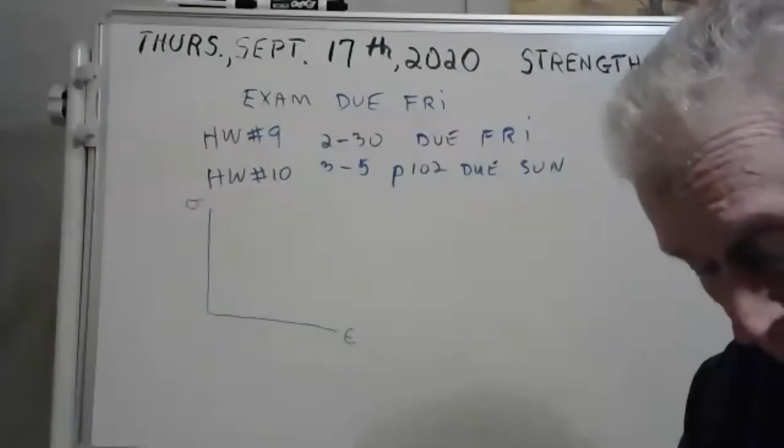And it's unique. If you take a particular alloy of steel, for instance, see they have some sample ones in the back. They have A36 structural steel. They have stainless steel. They have tool steel. They have other stuff back there, brass, aluminum. They have a stress-strain diagram that's as unique to them as your fingerprints are to you.

They identify the material. Now you need to know a few terms here when it comes to properties of materials. There's brittle and ductile materials. You guys can read all that, all of that is on the blackboard. You can read it. It's all right there.

But when it comes to materials, there's brittle materials and there's ductile materials. And the difference is brittle materials don't have a yield region. Like, for instance, concrete goes like this, pow, with no warning whatsoever.

They have a concrete tester. They go out to the highway and they take a core sample of your road, concrete, asphalt, whatever it is, and they bring it back to their testing lab, and they put it under a lot of pressure, and they increase the pressure, and increase the pressure, and all of a sudden, without warning, pow! And sand, there's sand in that concrete, it goes flying all over the place. You want to have your safety glasses on when they do that test.

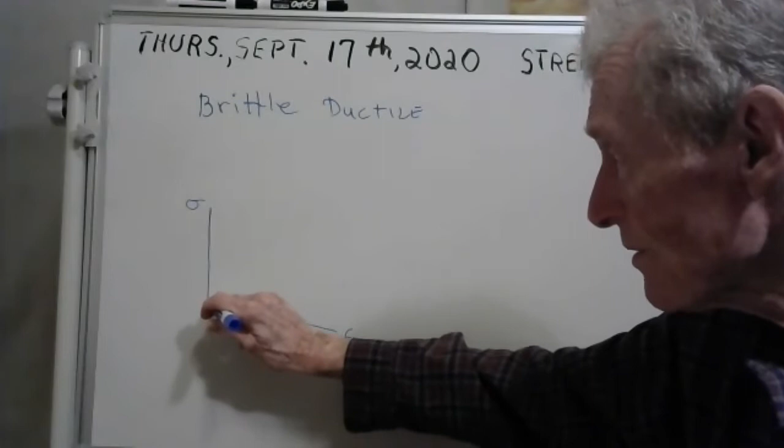There's no yielding, it's brittle. Whereas steel has an elastic region that comes up here—really very steep—and then it flattens out. Then it does all kinds of crazy things, and finally, kapow, it will break as you increase the tension on your steel. This right here is called yielding. Well, all of this is called yielding. But see, steel has yielding—brittle materials don't.

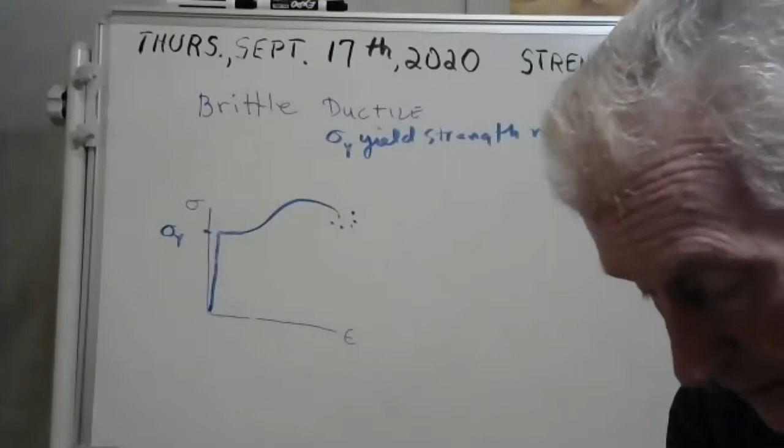This place right here is called the yield strength. The symbol is sigma Y. It's called the yield strength normal stress. That's the name of it. They have tables of it in the back—go back here, and there's the yield strength of different alloys of aluminum and copper and brass and steel. They're all in the back. It's called the yield strength.

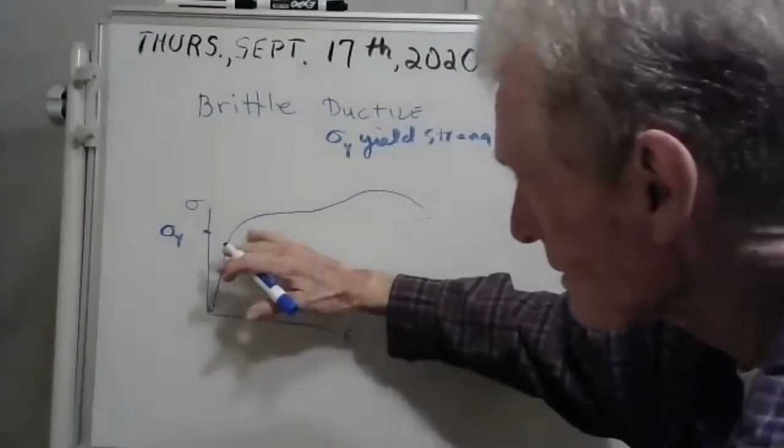Now, to be honest, some of these materials don't go exactly flat like that. Let me show you what they'll do. Some of them will come up here—they'll have a straight line—but then it kind of curves a little bit like that, and pow, like that. So where exactly do you put the yield strength? Do you put it here? Maybe in here someplace, or where it starts to turn? Where do you put the yield strength?

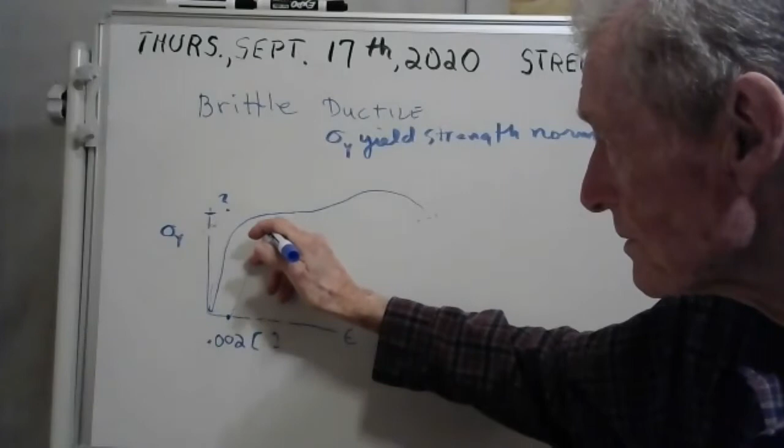Well, they made an agreement. They come over here at 0.002 nothings—remember, strain is dimensionless. And if you come up here parallel with the same slope—remember the slope is called the modulus of elasticity, it's the slope of the elastic region. See, this is the elastic region.

Everything else is the plastic region. That's not exactly parallel—let me try again. Parallel is more like maybe like that. If you come up here parallel and you hit this, and then you go over, that is defined as the yield strength normal stress for 0.2% permanent strain. It's got a fancy name. Can you read my writing? That's supposed to say elastic. That place right there is called the yield strength for 0.2% permanent strain.

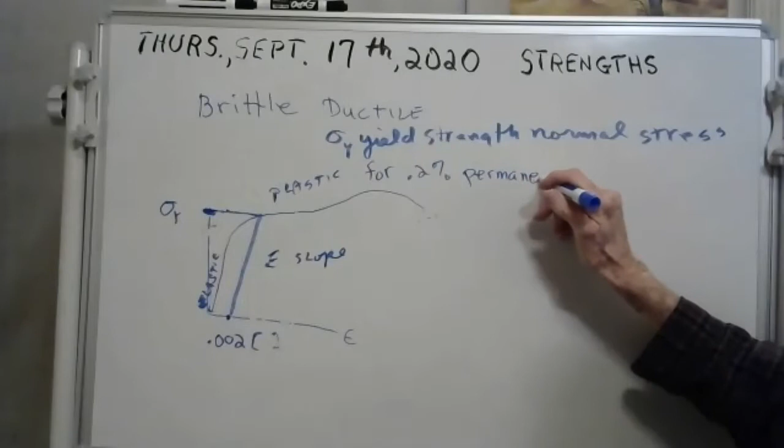Remember, this here's strain—we got strain down here. And see, 0.2% is equal to 0.002. You guys all took grammar school percentage math, you know that. So if you go parallel to your same slope here, and then go over, they call that your yield strength for 0.2% permanent strain. See, this right here is your permanent strain.

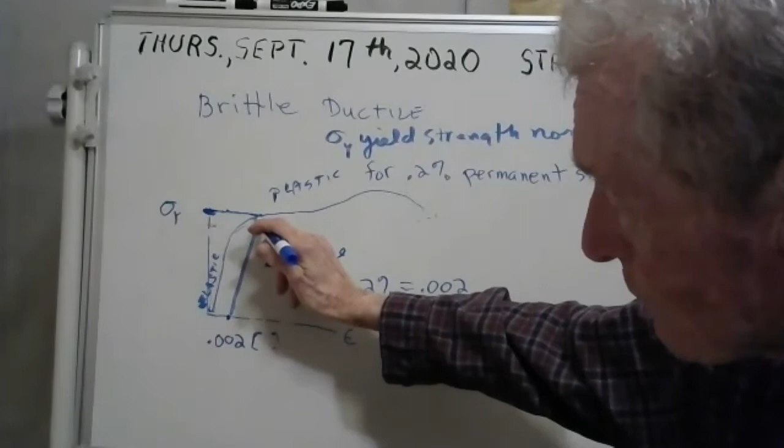What you got to understand is when you take the load off—see, you're increasing the load, increasing the load. Right here, if you take the load off, if you quit stretching it, you've got this sample, this specimen, and if you take the load off, it recovers elastically. This right here, if you go straight down, let me color that green. See that green right there? That's your strain recovery. That's the name of that—your strain recovery.

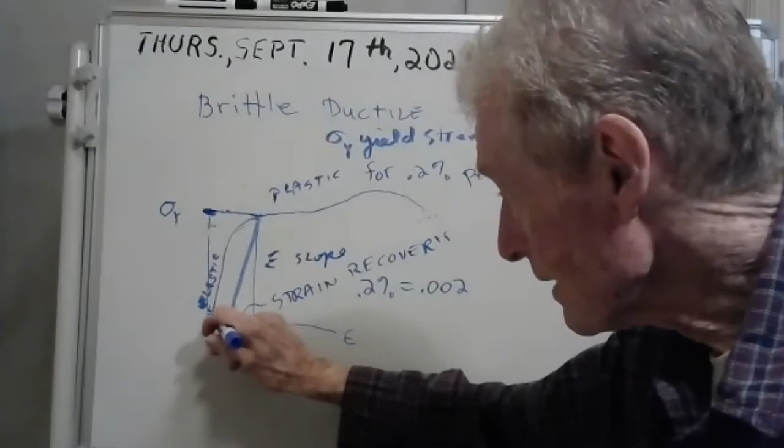And this right here, why don't I color that maybe something? That right there, that's your permanent strain. Permanent strain. Did that show up? Yeah, I think so. Well, there's brittle materials and there's ductile materials. Ductile materials have a yield strength, brittle materials don't. Any questions so far?

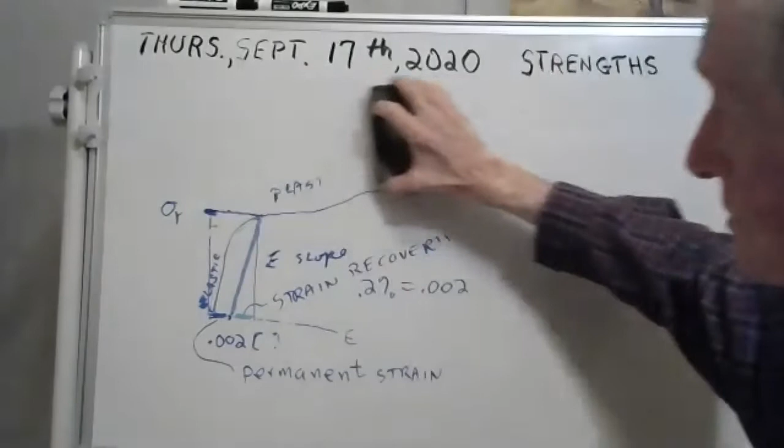Okay, well let's talk about hardness and softness. I'm going to erase all this, I need the room here. We talked about brittle materials and ductile materials—you could read the book, you don't need me, you could read the book. But there's something else called hardness and softness. Hope you can read my writing.

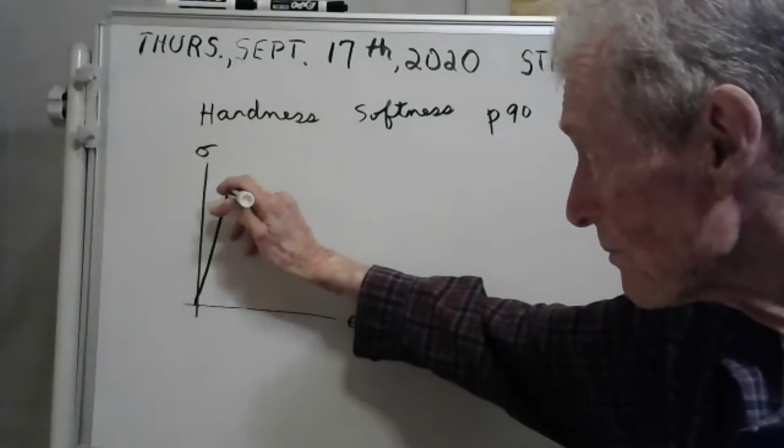Okay, there's a diagram in your book that explains this really good. If you look on page 90, they have a stress strain curve for a bunch of different steels. What's interesting is they all have the same slope. But see, spring steel has a yield strength way up here. And hard steel is right here—this is hard steel. This is on page 90.

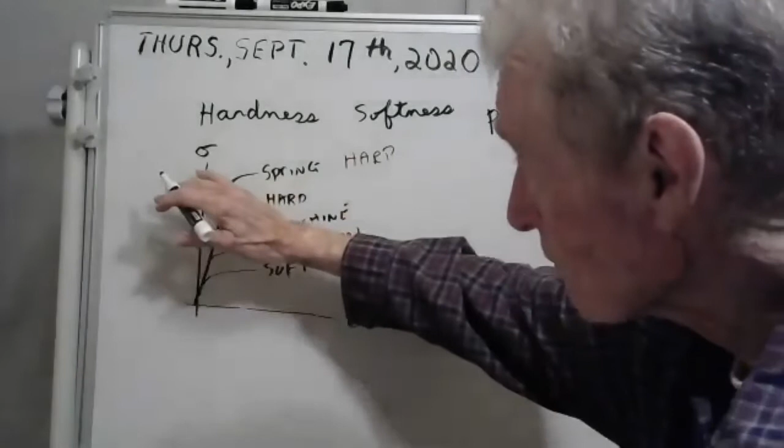This is spring steel, what they make springs out of. This is machine steel—it's pretty dang hard. And then this is structural steel, right in here, you guys could read this. These are all different kinds of steel. And then there's soft steel—there you go, soft steel. See, these are the hard ones, and these are the soft ones. And it's the yield strength—the hard ones have a big yield strength, and the soft ones have a small yield strength. That's the difference between hard and soft. If it's steel, if it's the same molecular structure steel, the same alloy, then it has the same slope—it has the same modulus of elasticity. Remember, Hooke's law goes like this.

It's kind of like an equation y equals kx. You guys studied algebra, that's the slope. If you plot up y equals kx, that's the slope. Well, if you plot up sigma equals E epsilon, that's the slope.

Now, how do you make a steel hard? How do you make it soft? There are three ways to make a metal like steel hard. I will ask you guys, I don't want you to fall asleep.

Samuel, unmute. Samuel, say hello. Hey Samuel, I'm just going to ask you, do you happen to know the three ways of making steel harder? No. That's okay, you're going to learn. I'm going to tell you.

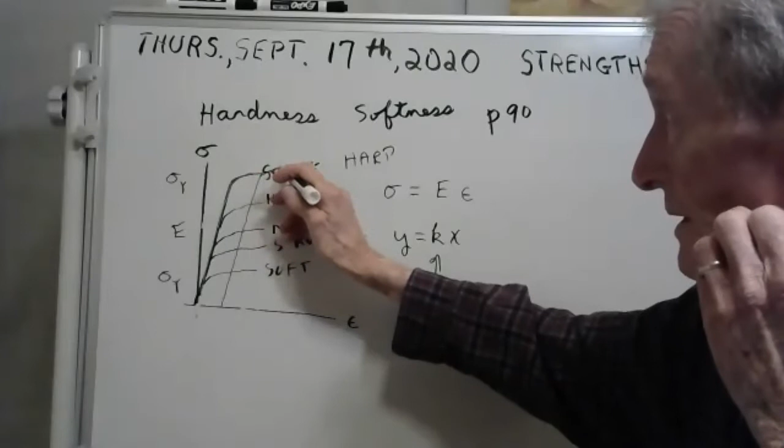Now another way is by stretching it, putting a lot of tension force on it. For instance, if you take your steel and put a lot of stress on it, then back off, it will recover elastically. You have now a stress strain graph that comes way up here and has a very big yield strength. They call that strain hardening. They overload it and then take the load off, and what they've got left is a hardened steel.

Okay, well, there's the three ways that they harden steel.

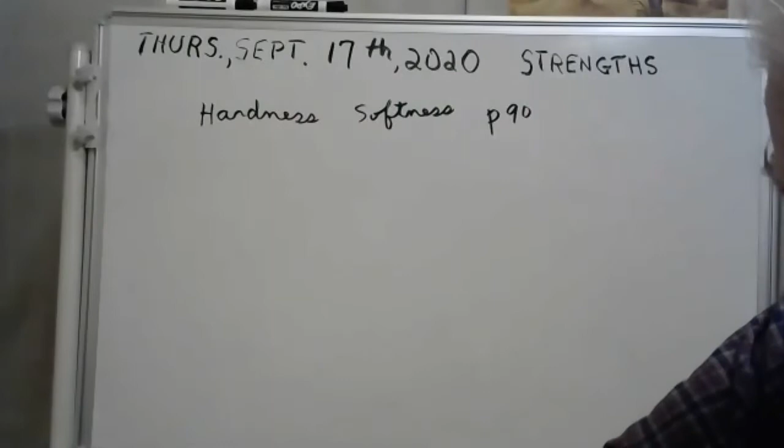Now we've talked about hardness and softness, and ductile, and what was the other one? There's ductile and there's the other kind. What's the other kind? Let me ask somebody. Nicholas, there's hardness and softness, and there's ductile and something else. What's the other one, Nicholas?

Brittle. Yeah, brittle, that's right. They're ductile and brittle. Yeah, okay, we talked about that. Ductile and brittle.

When I think of brittle, I think of peanut brittle. I don't know if you've ever eaten peanut brittle, but it's pretty good stuff. They have Spanish peanuts in there. It's kind of a brown color, and it's real hard, and it snaps. It's brittle, it's not ductile.

Now, if you want something that's ductile, take a piece of chewing gum, like Wrigley's Spearmint, and bend it. Well, it doesn't snap, it doesn't break in two, it just bends, doesn't it? See, the chewing gum is ductile. Peanut brittle is brittle. That makes sense.

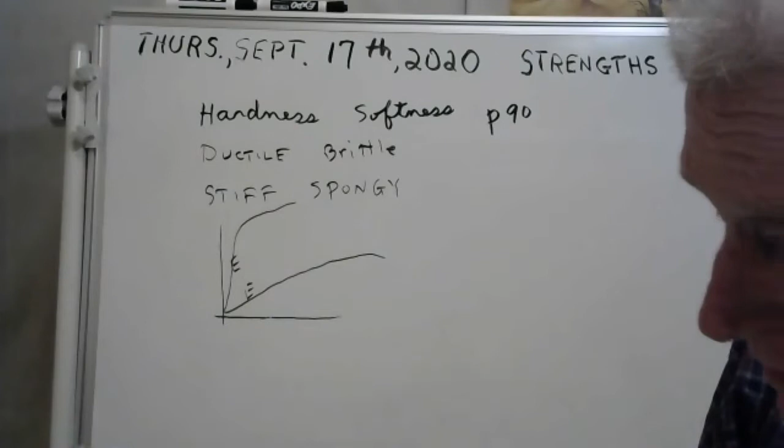See, a stiff material has a very big slope. There you got a big slope, and it goes on there. See, that's stiff. And here's the spongy one—spongy material, there you go. Look, the slope is smaller. Spongy materials have a small slope, and the name of that is the modulus of elasticity.

You can go in the back and look it up. Go back here, modulus of elasticity. Well, there they are. They have some numbers that are big and some numbers that are small. Like, for instance, they have an aluminum one, it's 10.6. And what it says is 10 to the third KSI. If you look in the back, you'll see this for one of those alloys of aluminum.

Now, I would write that as 10.6 MSI, because if you have 10 to the third KSI, that's equal to an MSI, all right? But down here they have structural steel. The modulus of elasticity for structural steel is 29, then they have that 10 to the third thing, KSI, but I would write that as 29 MSI.

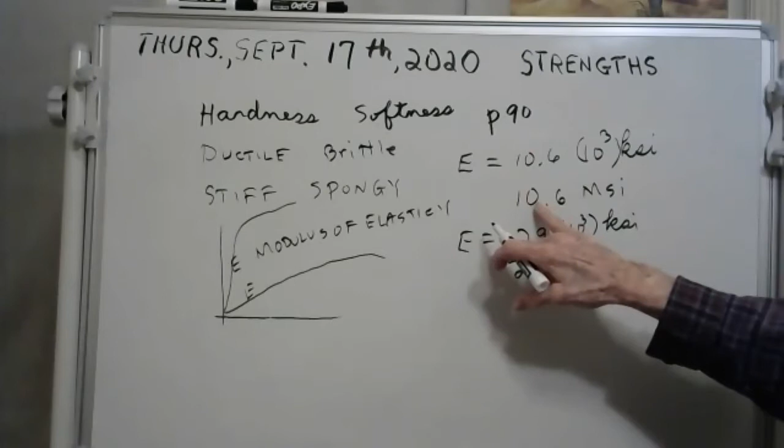Well, you know what, this one here is the spongy one, because see, the slope is smaller. See, that slope is small, and this slope is big—this is the stiff one, and this one's the spongy one. You can look them up in the back.

Do we have any questions so far?

Okay, well, let's talk about how much energy you can apply to your specimen of whatever alloy it is before something bad happens.

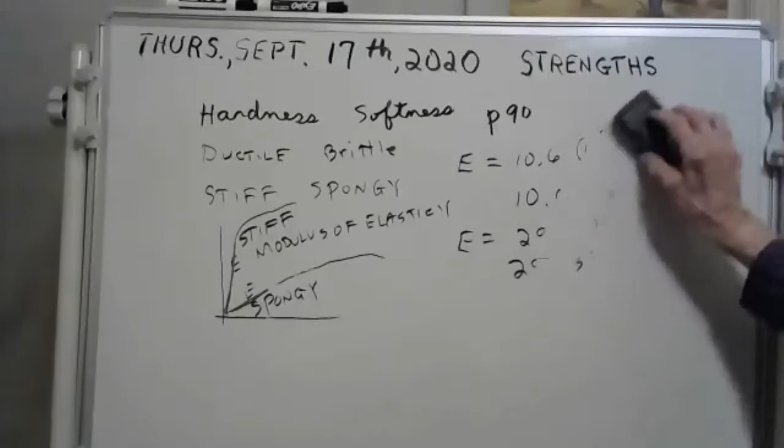They have two measures of how much energy that a particular material can withstand. They have the modulus of rigidity. I just had a senior moment there.

You guys could read all this in the book. It's the modulus of resilience. The little symbol is U with an R under it. This is in your book, on page 95. It's called the modulus.

We'll do a little bit more theory and then we'll work on some problems. I know you love the problems, but they're based on the theory, so we have to suffer through a little theory.

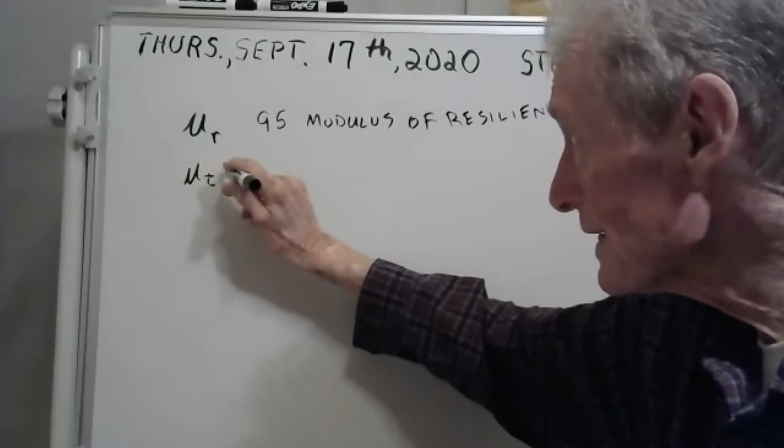Now, this is called the modulus of resilience. And they also have a thing called the modulus - it's got a little T underneath it. This one's on page 95, and this one is on page 96. And this is called the modulus of toughness.

Modulus of toughness. Now, what this modulus of resilience is, in the elastic region. Now, somewhere up here, you reach the end of the elastic region, and then stuff starts to happen. You enter the plastic region, and all kinds of stuff happens here.

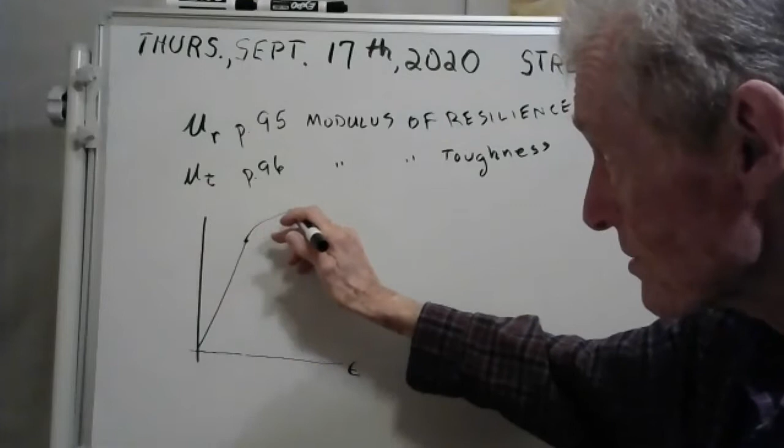But this modulus of resilience is the area, it's the area underneath your elastic region. See, this is your stress strain curve. And you guys all know how to measure a triangle. You go 1/2 the base.

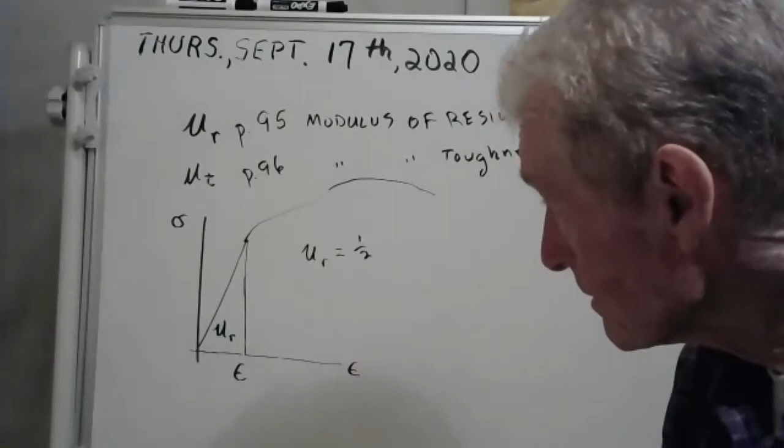Now this has a name right here. It's called... oh gee. Why don't we just call it the... never mind, I'm not going to call it anything. I don't want to tell you the wrong stuff.

What this is going to be is 1/2 the base times the height. See it there? Here, let me do it this way.

They have a material called - these are fictitious, they don't really have materials like this - but they have a material called an elastic perfectly plastic material. Let me write that for you. Elastic, it's just a model. It doesn't exist in the real world. Elastic perfectly plastic material.

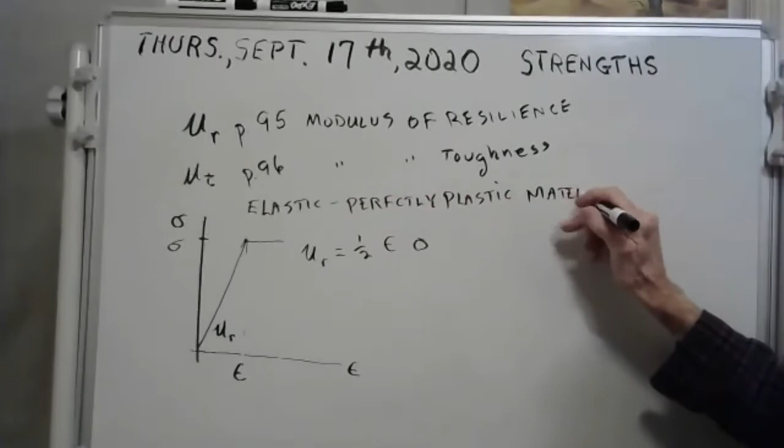If you have one of these, which they don't exist, but we're just pretending, then you have this perfectly elastic region, comes up to here, and then it goes plastic, and then the plastic is just absolutely flat. Isn't that nice? That's not what the real materials do.

But in this case, this would be your yield strength. And this would be your yield strength normal strain. And so you could put your yield strength normal strain and your yield strength normal stress right there. And you would have 1/2 the base times the height. You would have this area. Okay.

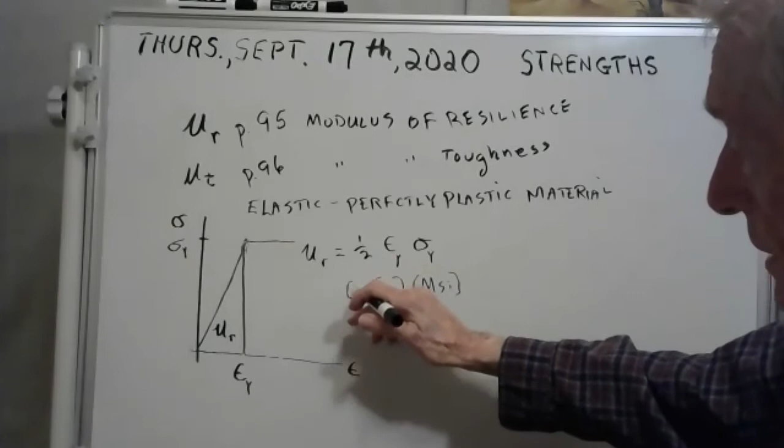Now let's look at the units. The units are nothing for strain. And usually these are in what? Megapascals? Yeah, well, I think we were doing English, senor, and they were MSI, weren't they? These were in MSI that we were looking at in the back. And of course, the 1/2 doesn't have any dimensions. And so this has dimensions of MSI, but that's not what we want.

What we're going to do is we're going to try to write it in terms of energy per volume. That's what this is. It's energy per volume.

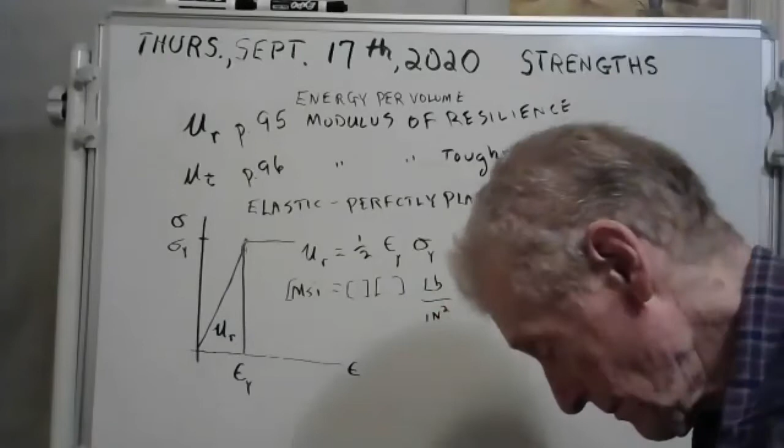Okay, how are we going to do that? Well, see what this is. You know what that is? It's, well, it's mega - never mind the mega - but it's pounds per square inch. It's a megapound per square inch.

Well, we can get that in energy. We can get that in energy per volume by simply multiplying by inches over inches. And did you know a pound inch is a unit of energy? A foot pound is a unit of energy, and an inch pound or pound inch is a unit of energy. And so what we have is inch pounds or pound inches per cubic inch. We have the energy per volume.

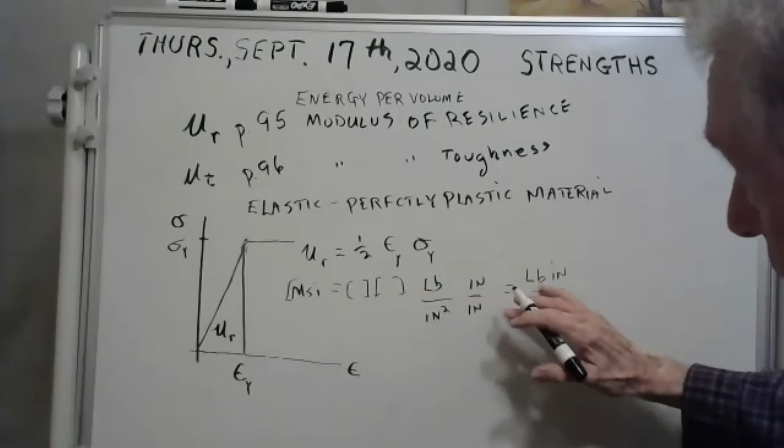What does that mean? That means you can absorb this amount of energy per volume, and then if you remove the stress, your piece will return to its original shape, and you'll never be able to tell the difference. It's kind of like a rubber band - take a rubber band and you can stretch it, and then remove the stress, and it'll go right back to where it started with no permanent deformation. That's what the modulus of resilience is. It's the energy per volume.

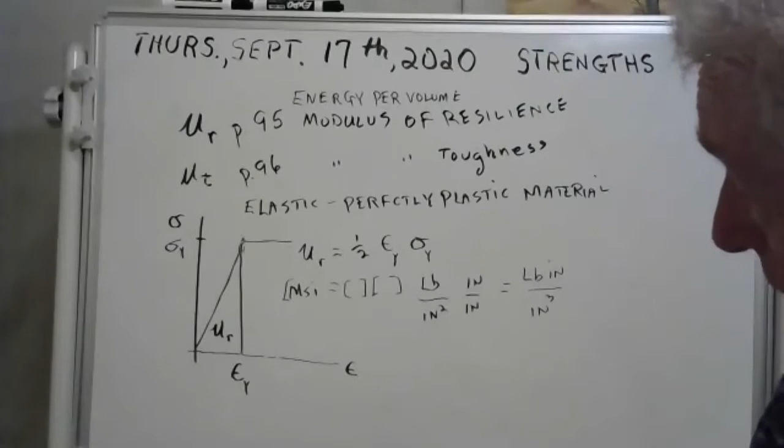Now, usually though, they put this in foot-pounds per cubic feet. Now, here's how you could do that.

You know that there's a square foot for every... wait a minute, I'll get this right in a minute. How about this? Let's go, a foot is... I'll get this in a minute, just a minute now. How about this here? 12... foot... uh, 12 inches is a foot. We all agree with that. You're not going to argue with me on that.

Now, if you cube this - if you cube it - I don't want to cube it, that'll get rid of the cubic inches. No, I just want to square it, I think. Now let's see what we got. We got rid of all the inches, and what I want is foot-pounds per cubic foot, is what I want.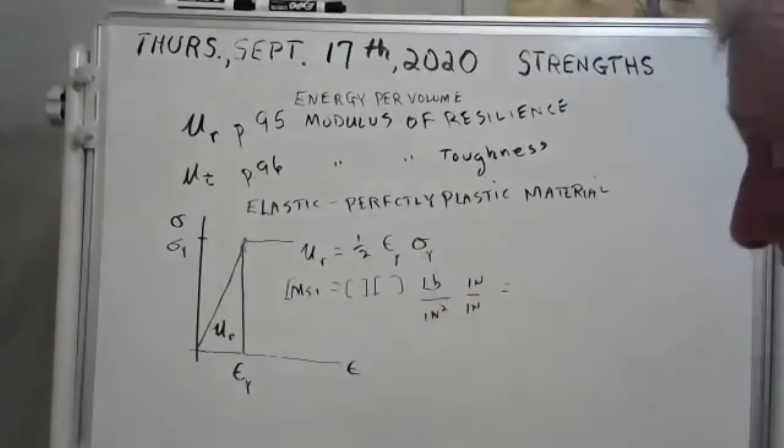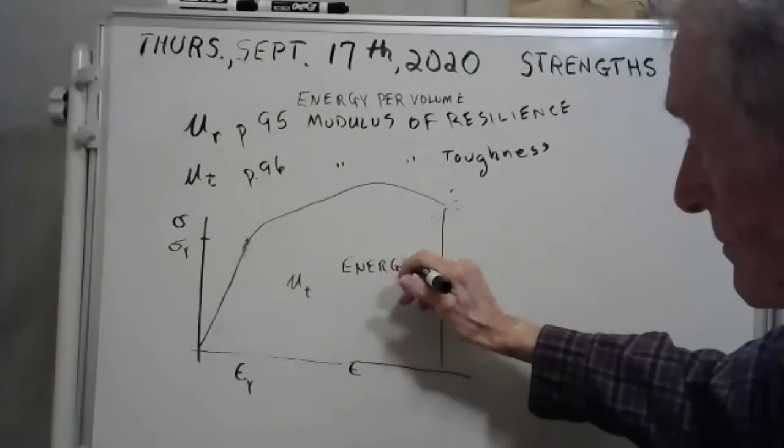Now this here is called the modulus of toughness. On a real alloy, it doesn't come up here and go straight, because these materials are not perfect. They do all kinds of weird things. They come up here and then kapow, they fracture. The modulus of toughness is not just the area under the elastic region, it's the whole area under the whole graph. That's the modulus of toughness. It amounts to the energy per volume that you can absorb before fracture, all the way up to fracture. It's the energy that your substance can absorb all the way up to fracture.

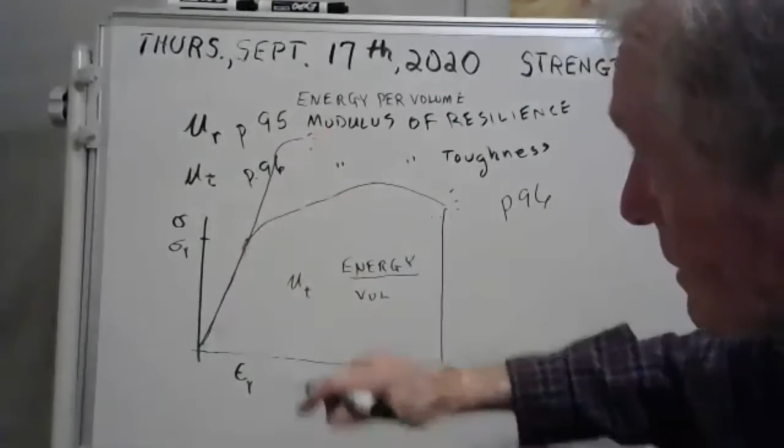On page 96, they have three different steels. They have a hard steel. Remember, the hard steel comes up here, it goes way up here, but then kapow, it fractures here. So the modulus of toughness for it would be that area under it. Then they have structural steel, that's more like this one, and it has a very large area under it. It can absorb a tremendous amount of energy per volume before it fractures. Then they have soft steel. Soft steel is down here like this, and it fractures, and the amount of energy it can absorb is this area under it.

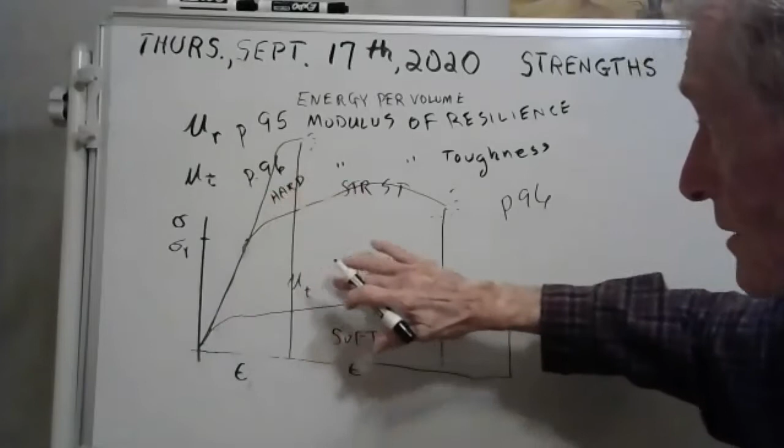Well, it turns out that the area underneath the structural steel is bigger than the area under soft steel, and it's bigger than the area under the hard steel. And that's why they use rebar that's made out of structural steel. It can absorb, say a car runs into a bridge, and the bridge breaks, but it can absorb the most energy. That structural steel can absorb the most energy all the way up to fracture than any of the other alloys. We'll need to work a problem on that, and I'll try not to get confused.

Well, that's all the wonderful theory for right now. We're going to work some problems now. But do you have any questions? I wonder if anybody's still awake out there. I'm hoping.

All right, let's work a problem. You guys should read all your book there on that. But this one that I wanted to do with you is Fundamental Problem 3-11. Now let me find it. Help me find fundamental problem 3-11. Aha, I found it. It's on page 101.

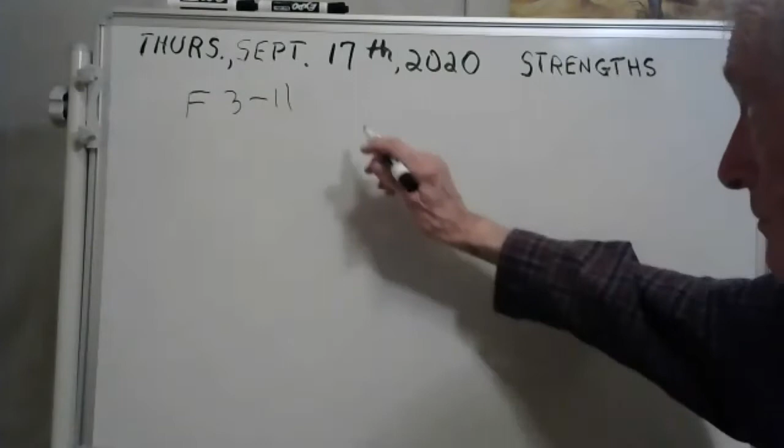And we could even do the modulus of resilience and modulus of toughness on that. That would be fun. All right, let me read this. They've got this graph here. Let me draw this. Got a stress strain graph. Remember, these are like our fingerprints. This goes up to here, and then it goes over to here. This value is 450.

Does that show up? Yeah, that shows up. And this value right here, that's 550, and these are megapascal. Okay, and now this value right here is 0.00225. 225, nothing, strain doesn't have units. And this value right here, come down to here, is 0.03. Okay, great. So what?

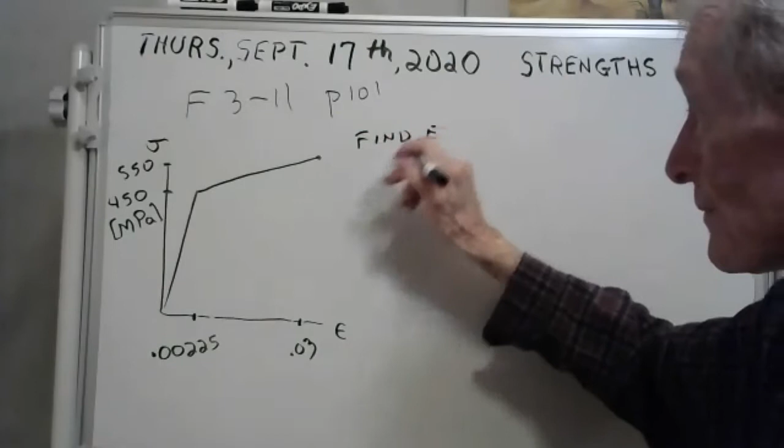Well, first of all, I want you guys to find the modulus of elasticity. Find the slope. I'm going to shut up for a tiny minute. See that this is the elastic region here, this is the plastic region. I'll be quiet, find the slope. Go ahead, I'm going to do it, and then I'll call on one of you guys. Find it.

Okay, well, let me go to one of my excellent students here. Why don't we go to Alex? Alex, unmute and say hi. Hello, Alex, do you have this modulus of elasticity for this elastic region here? I got 450. Is it just the 0.00225 squared, and then the 450 squared? No, it's just rise over run, Alex. See, this, I overcomplicated it. And boy, you sure did.

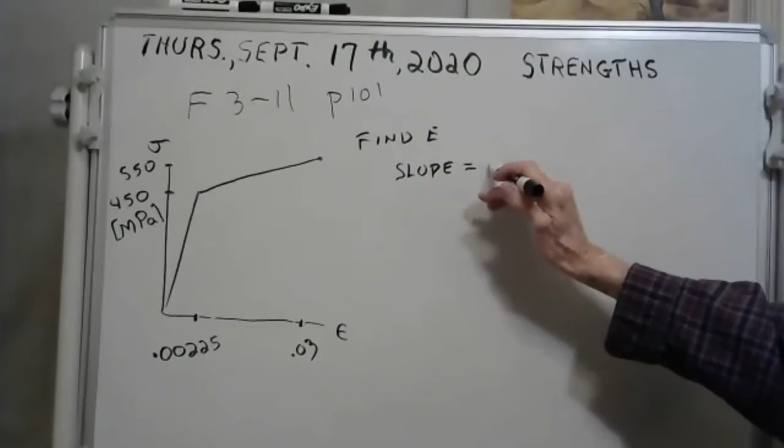Do it again, Alex. What do you get? I get 2 times 10 to the 14th power. You're getting closer, but that's still not right. Did you divide by the run, which is 0.00225? Yeah, let me redo it one more time. I'm getting 2 times 10 to the 11. That's correct. Good going, Alex.

Good going. Now, they usually write it like this, Alex. They'll go... and it's here. What Alex got is right. They got 2 times 10 to the 11th, and those units are pascals. 2 times 10 to the 11th pascals. But they usually write it like this.

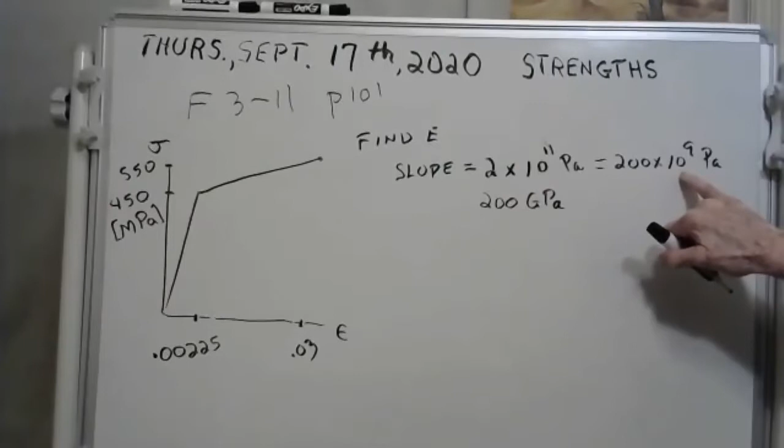200 gigapascal. See, if you multiply that by 100 and divide that by 100, if you make this one smaller, you got to make this one bigger, and you get 200 times 10 to the 9th. Well, that's a giga. So we just figured out our slope.

It might be fun to go in the back and see if we have any that are in that ballpark. Can you find any that have a 200 gigapascal modulus of elasticity? I'm still picking on Alex. Alex, go to the very back page of your book and look for a 200 gigapascal and tell me what you find. Okay, where is this in the back of the book?

A very, very back flap page in your book. I'm using an online text, which is why I'm asking. Take your time. Do they let you look at the back page on that online text? Like the very, very back page? Yeah, the very, very, very, very back. It just says useful references, fundamentals, equations of mechanics. Is that what we're looking for? Maybe.

We got to know how to, all of you -- I'm picking on Alex, but this is for all of you -- you've got to be able to find these tables in the very back. And Alex is trying to find his now. Yeah, I'm not finding it. Somebody out there, we got a whole crowd of wonderful students. Can you find a 200 gigapascal modulus of elasticity for the property?

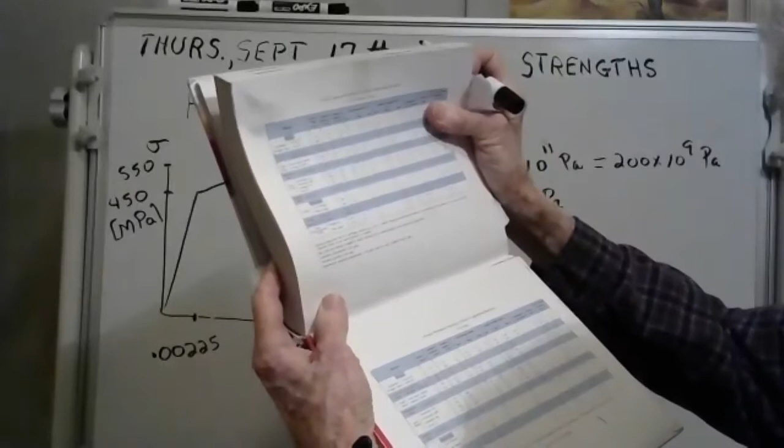But I need somebody back there. We got to be able to find this table, or we're in trouble if we can't find this table. Somebody out there, tell us how you get to that table with your online book. Is it the steel alloys? Say that again. Is it the steel alloys? Yeah, it is. Which one is it?

A36 and A992, they both have... Yes, that's right. And you found that -- that's Mohammed, isn't it? Mohammed, you found that table in the back of your book or your e-book, didn't you? No, I have the physical book. Oh, you have a physical book, okay. It's probably structural steel, probably A36 structural steel.

Now, I need to talk to somebody that can find that table in their book. Can anybody do that? Kind of worried about you guys. How are we going to be able to look up stuff if we can't find this table? The name of the table is Average Mechanical Properties of Typical Engineering Materials.

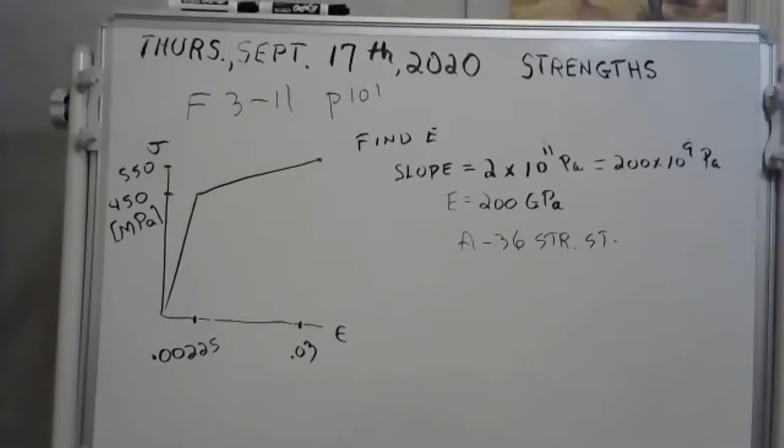Well, I don't want to take up all hour for people trying to find something. We have to go on, but we found the slope. It's 200 gigapascals. And if you can find the table, that's most likely structural steel. Okay, well, let's go on. And if anybody can find that table on your ebook, please unmute and tell us, okay? But right now we're doing F311, let's see where we are here.

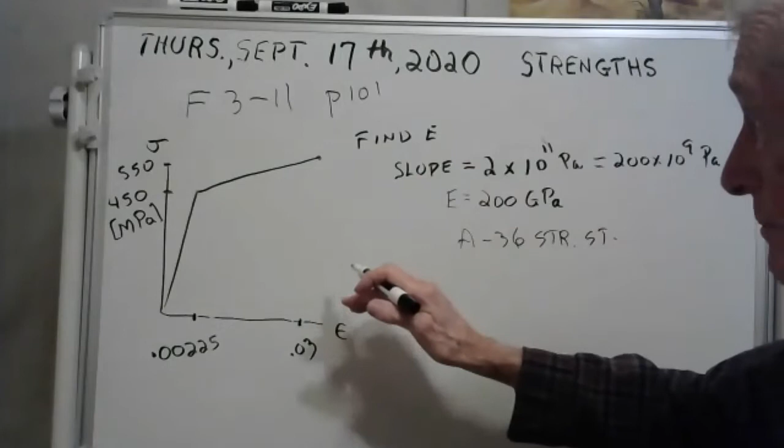311, I got lost. Here we go. Now they had a specimen that was 50 millimeters long. Well, here, let me draw it. I'm going to draw it here. It's 50 millimeters long. And they said there's 150 kilonewtons tension on it, and they said the diameter is 20 millimeters. So see, we can get the stress.

The stress is just the force, 150 kilonewtons, divided by your area. So I want you to do that for me, and I'll call on somebody. Find the stress. I will shut up for 1 minute. Find the stress on that specimen.

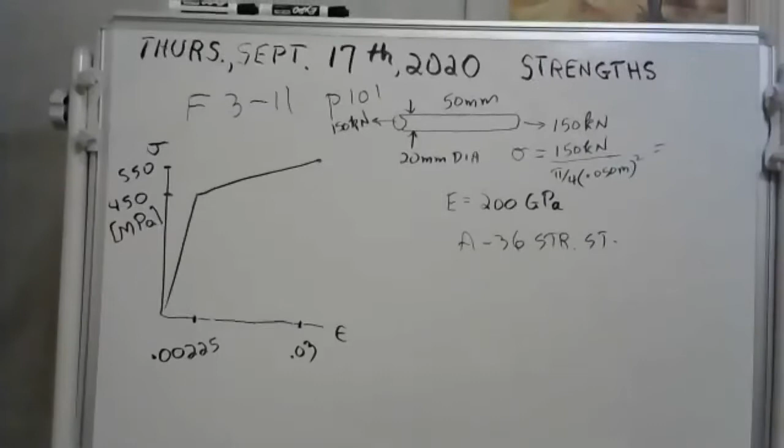Mr. Griffin? Yes. The diameter is 0.02, not 50. This is wrong. Mohammed, you just got a nice thank you point. The diameter is 0.02, I don't know where I got the 05 from. Okay, go ahead and get the stress now, now that Mohammed has helped us by giving us the correct diameter.

Okay, let me pick on Mohammed. Mohammed, what'd you get for the stress? Just a minute. I got 477,464.82. Yeah, now that's correct, Mohammed, but what we really need is megapascal. Can you write that in megapascals for me? He's got the right numbers.

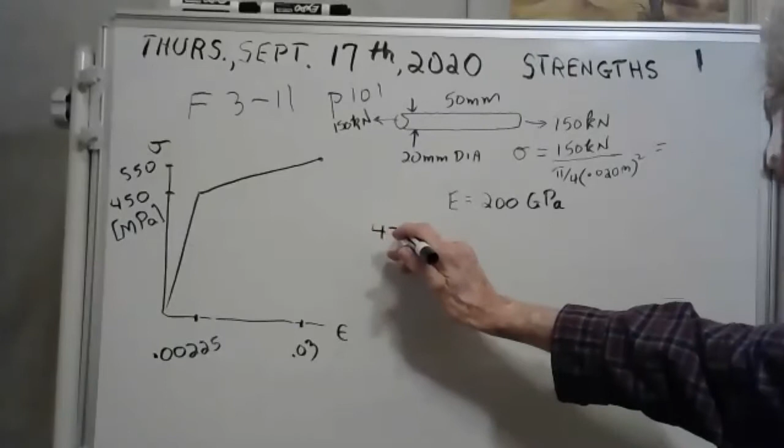See, we want the stress in megapascal. So what do you think it is in megapascals, Mohammed? What, Mohammed, just tell me what you got. What was the number you quoted? Let me write it down. What did you say it was? It's 477,464.82. Now I need to know what the units are for that, Mohammed. What goes in these units here? It's gonna be kilopascal. That's right, kilopascal.

Good going, Mohammed. But now we want megapascals. So what we're going to do is we're just going to write this as 477. Why don't I just round it off? And now we have megapascal. Mohammed, do you understand that? Yeah, I got that too. Good, excellent. Okay, now let me show you where that is.

It's darn close to halfway between here. See, 475 would be exactly halfway between, wouldn't it? Would it? I don't know. Would it? 475? No, wait a minute. No, it wouldn't either. See, there's 100 difference there, huh? And we're only going 27.

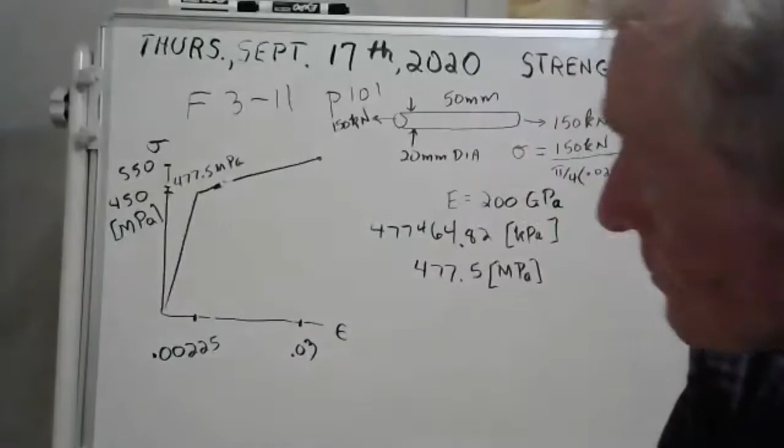You know what? It's about here. It's about in here. The 477.5 megapascal. It's about a quarter of the way, isn't it? Because see, halfway, in fact, it's a little smaller than I have it there. It's more like that. About in there. Because see, halfway would be 500. Halfway between 450 and 550 is 500. We got 477.5. We're right about there.

I need to know what this strain is right here. If you come straight down, I need to know what that strain is. Okay, well, let's get that.

We have a little triangle right here. Here, let me put it in green, okay? You see this little triangle in green right here? And then we have a big triangle in green right here. Those are what they call similar triangles. Hopefully you guys took geometry in school.

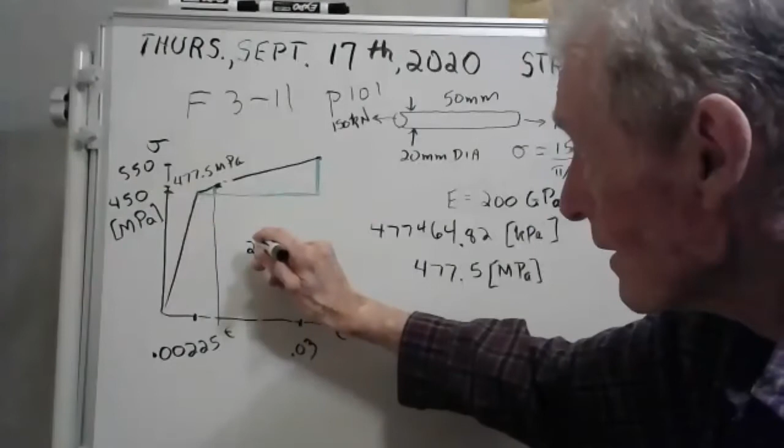And so you can set up a ratio. You can say this little distance here, which I think is, well, it's 27.5. See, if you go from 450 to 477.5, I think that's 27.5, is to this little distance here. Here, I'll make these black. There you go. And now this little distance here, we'll just call it epsilon for right now. In the little triangle, we'll equal this big distance here, which happens to be 100, I believe. To go from 450 to 550, that's 100, right?

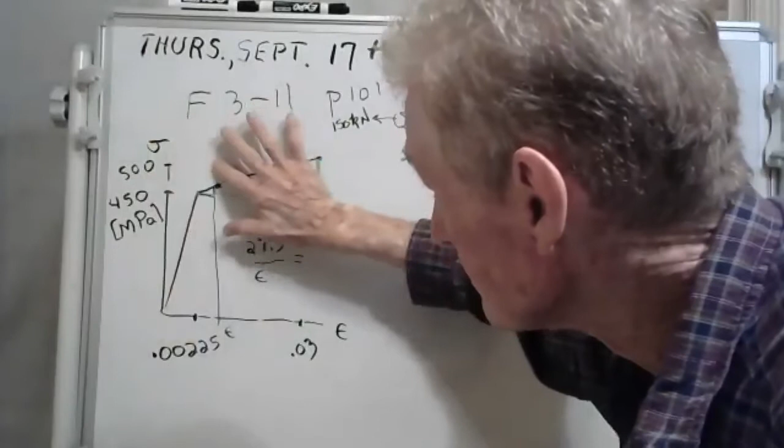Now, wait a minute. No, wait, no, I'm doing this wrong. That's 500. I wrote that wrong. I need you guys, I need somebody out there to help me here. That was wrong. And then we're going to get this right, though. But it wasn't 550, it was 500. I wrote down the wrong number.

Okay, now what I'm going to do is, it turns out that the 477 is dang close to halfway between. That puts us right about here. See, the 477.5 megapascals is pretty close to halfway between 450 and 500, isn't it? Yeah, because see, the difference is 50, and you've got a 27.5 difference.

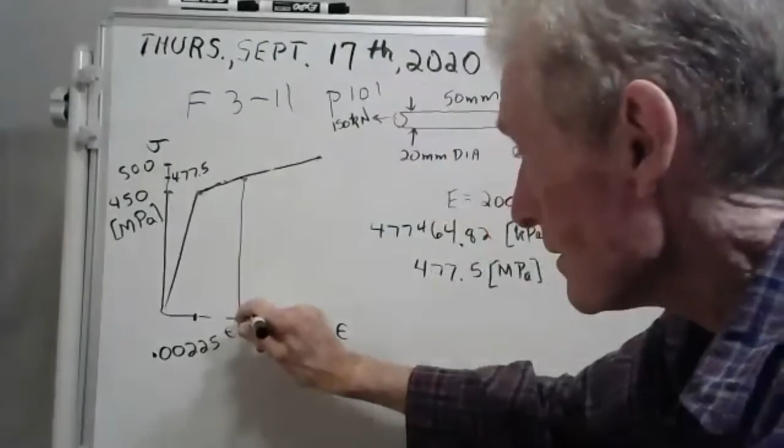Now, what I really need is, I need to know what the strain is here on our piece. See, this piece is going to be longer, and we can find out how long it is. And here's the plan. I'm going to make two triangles. There's one here, and then there's a bigger one here. Yeah, there we go. And I'm just going to set up a ratio when you have, what do they call those? Similar triangles.

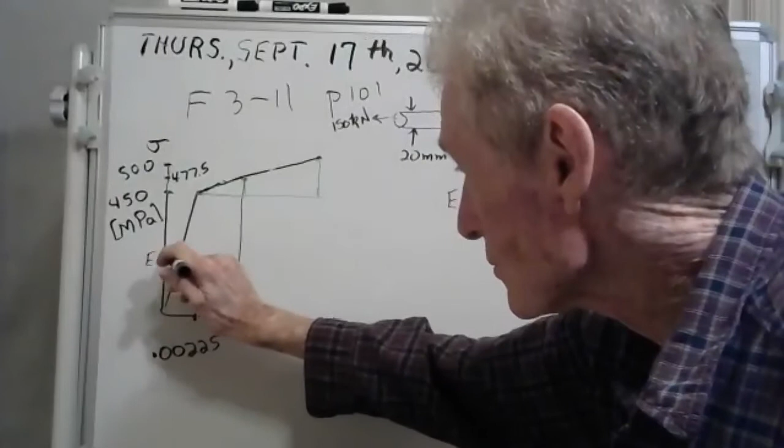Here, let me write this value for E here. E is 200 gigapascal. All right, now I'm setting up a ratio. This little distance here is 27.5, and this distance here is, I don't know what it is. We'll just call it delta epsilon for right now, from here to here. Delta epsilon. And that should equal this distance here, which is 50. See, from 450 to 500 is 50, right? I think so. Yeah. Now these happen to be megapascals.

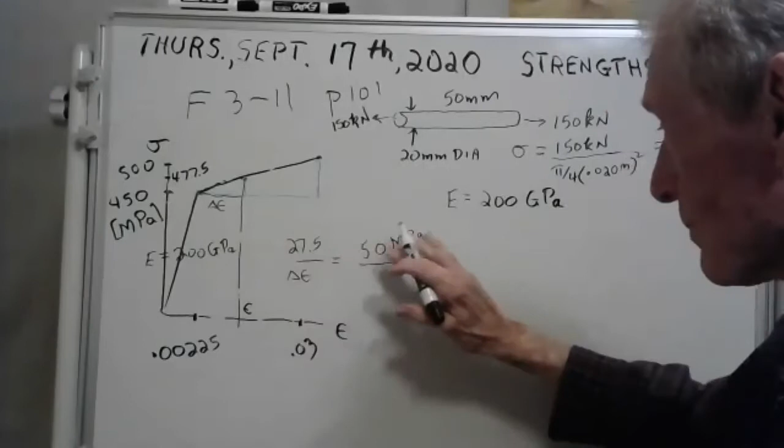But see, that's going to cancel out, so we don't really care that they're megapascals. Here we're going to take this distance, 0.03 minus 0.00225. That'll be the distance from here to here. We can solve for this little distance delta epsilon, and once we have that, we can add it to this and find out what our strain is, and find out how long this thing is. Do you understand? It's going to be longer, and we're going to find out how long it is.

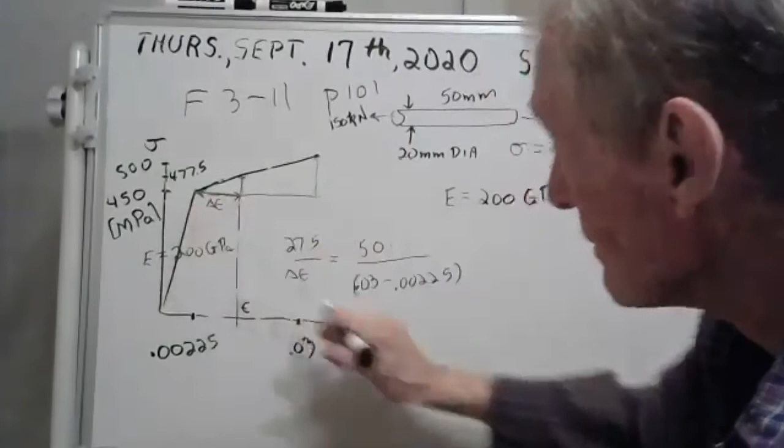Here goes. Put this in your calculator with me and find out how big this little delta epsilon is that I have right here. Again, I will shut up. Can you do that for me, please?

Well, I got a value of 0.01526, blah blah blah. Now remember, that's nothing, because strain doesn't have any units. But if you want this value of strain right here, you're going to have to add the 0.00225 to it.

Okay, let's do that. We're going to add 0.00225. There goes, I'm going to add that now. And here's what I'm getting: 0.0175, 0.017513. There we go, we now have our strain. Now I can figure out how long this thing is.

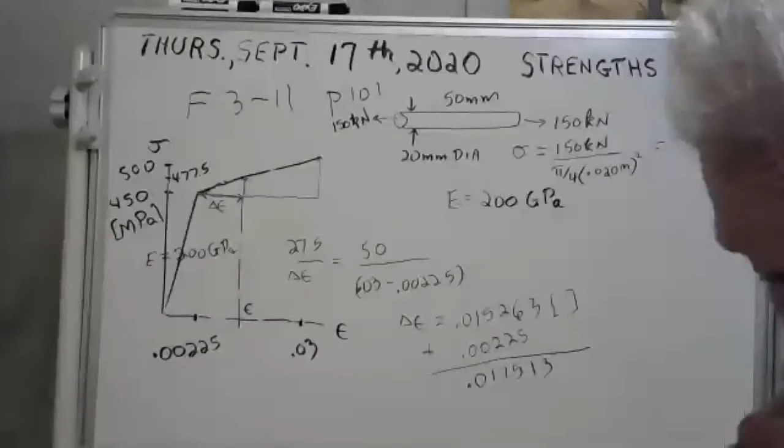Here, let me draw you a picture. Before you put this 150 kilonewtons on it, it was 50 millimeters long. But we're going to put the 150 kilonewtons on it, and it's going to make it longer. Here, I'll exaggerate it. You wouldn't even be able to tell, but see, I made it longer. And we're going to figure out how long it is. Well, I'll tell you what it's going to be.

It's going to be 50 millimeters times -- we found out what this strain is, it's 0.017513. So if you go 1.017513 times 50, that'll tell you how long it is. See, it gets longer by this amount of strain. So you have your original length, 1 times 50, plus the strain times 50.

Now let me see what that is. It made it longer. It's going to be -- I'm getting, this thing is not 50 anymore. It's 50.8756 millimeters. Hey, it got longer, didn't it?

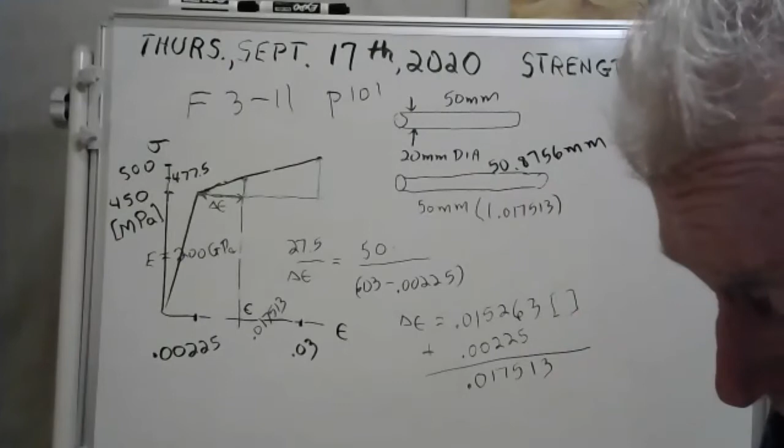It's stretched. Now, if you read the problem, if you just tuned in, we're doing fundamental problem 3-11, and there's answers in the back. We can go back and see if we did this right here in a little bit. It says here, the 150 kilonewtons is applied and then released, and they want to know the permanent elongation of this specimen. Well, we haven't released it yet. Here's our piece, and this is how long it is with this -- they said it was 150 kilonewtons. Let's put that on.

Mr. Griffin? Yes. I think you put the wrong value when you multiply with the 50 millimeter. It was 0.0175. I think we have 1.01753 when you multiply with the 50 millimeter. Okay, now when you solve here, you get a different answer? No, I'm saying when you multiply with the 50 millimeter for the new length, you multiply with 1.0175. Oh, it's 0.0175. Because I'm getting 0.8756 millimeter. Okay, Mohammed, thank you so much for speaking up.

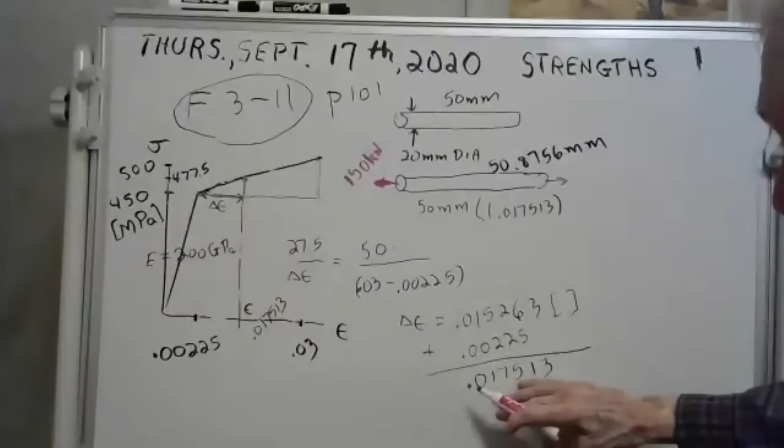I appreciate you so much, but I didn't quite understand. Are you saying that this is wrong? What do I need to multiply by? Okay, so look at the figure where you multiply 50 millimeter with 1.017513. Did you see that? Yeah, 1.0175. But on the bottom we get 0.017513, not 0.0175. Okay.

So what you want to do is take 50 times 0.017513. Is that what you want to do, Mohammed? Yeah, yeah. Okay, now what that will give you, Mohammed, is the amount that this stretches, see? That will give you the amount of elongation that it stretches. But if you want the total length, that's not the total length, you have to add the 50 to it, right? Yeah. So let me do that. That's 50 times 0.017513, I'm getting 0.8756. Yes, that's what I get.

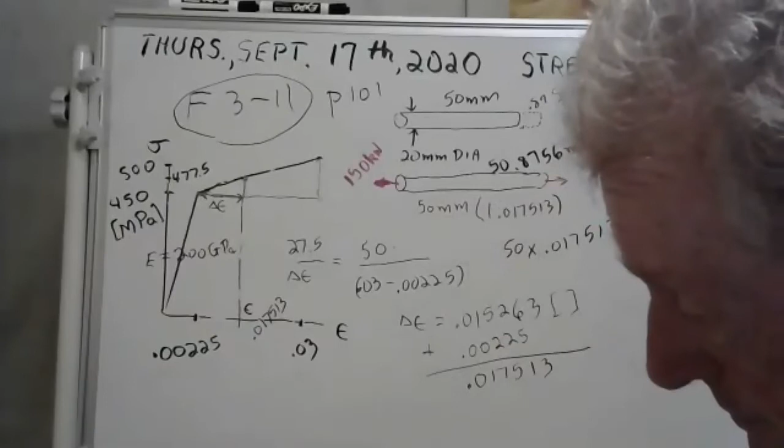Now, to get the total length, that's just how much it expands, Mohammed. You have to add -- if you want the total length, it was 50. Now this little distance here is 0.8756, right? And so the total is 50.8756, right? Oh, okay, I got it now. Okay, now Mohammed doesn't get another thank you point for that, but I still appreciate it. But you're okay, aren't you? Yeah, I'm okay now. He's okay.

Good, excellent. Okay, now here's what we're going to do now. We're going to release that, we're going to take that force off. Now, when you take that force off, here's what happens: it recovers elastically, it comes down here. I'm glad Mohammed spoke up, because some of the others might not understand. This is called the recovery. I'm trying to draw this parallel, it has the same slope. When you take the load off, it recovers elastically. Do you understand? And so now, what I want to know is, where the heck are we here?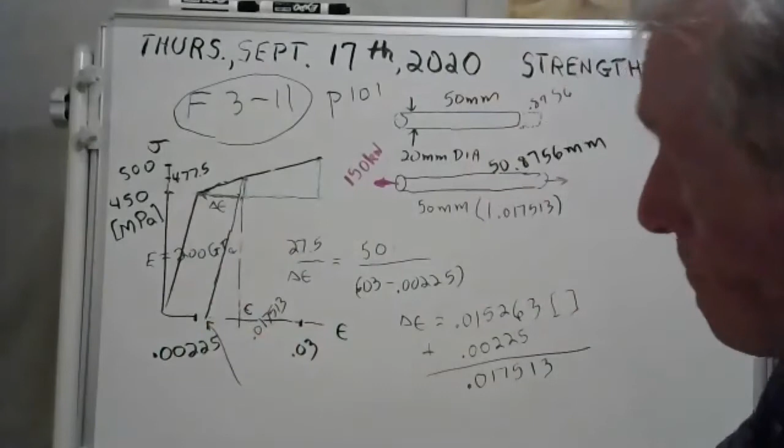Well, we can find it because we know what the slope is. We have a nice triangle here, and we know the slope. Let me make a little room here.

Here's what I'm telling you. Now I hope you're taking notes because I need the room here. What we're going to do is take this 150 off. And what we're going to wind up with is a specimen that'll be longer than it was originally because it's going to have permanent strain.

Does this come out? Yeah, this is called permanent strain. It's called the permanent strain. That thing's never going to go back to the way it was. It's permanently stretched, even when you take all the load off. And notice it's going to be a little bit longer.

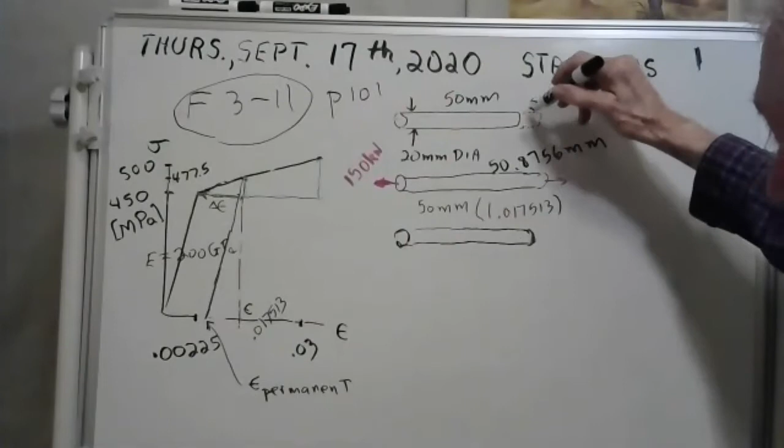See, it was this long. And then you put the load on it and it became longer. And we now know the new length. And then when you take the load off, it will shrink back some, but not back to the original. It shrinks back elastically. And we're going to find that.

Okay, now to find that, we have a triangle here. Here, I'll draw it for you. It's got, there's a triangle here. You see it? There's that triangle. And now we know the slope of the triangle.

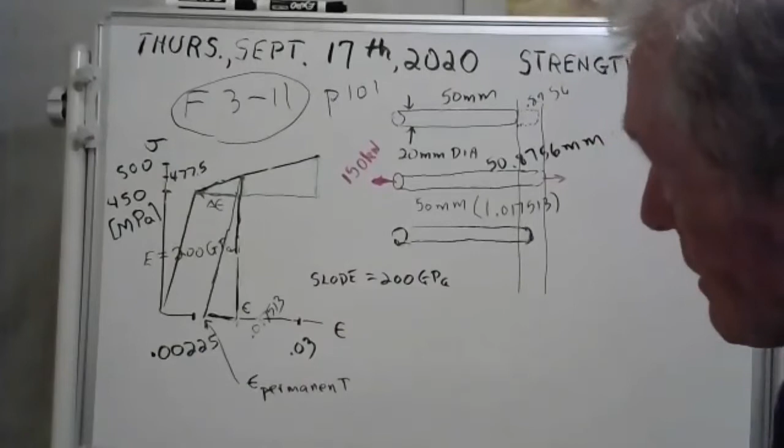The slope is 200 gigapascals. We figured that out earlier. I forget which excellent student helped us on that. And we know what slope is: it's rise over run. Well, the rise from here to here, we know what that is.

It's 477.5 megapascals. That's the rise. And the run, see this run here? They have a name for that. It's called, well, I'll make a symbol. I'll call it delta epsilon. I hope you can read my writing.

Delta—they have a name for it. It's called the strain recovery. See, this distance right here is called the strain recovery.

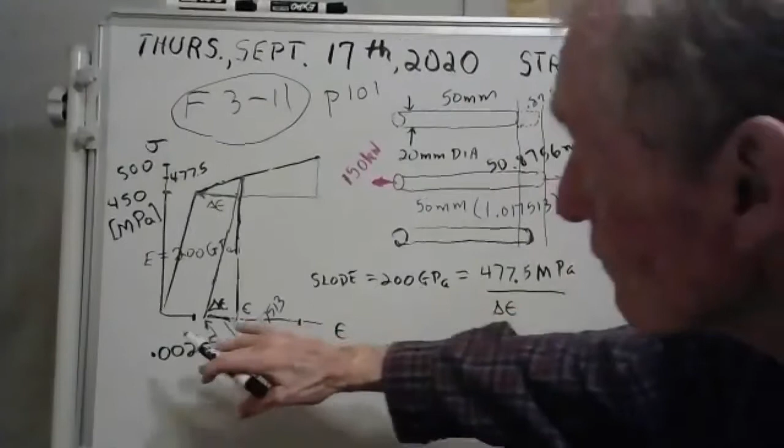And see, I don't know what it is, but look, we have an equation with only one unknown. We can find the strain recovery, can't we? Okay, now I'm going to shut up for a minute. I want you to find the strain recovery. We got the equation, it's just rise over run. Plug it in, get the strain recovery for me.

Okay, how about my friend Ben Harris? Ben, unmute and say hi. Hello, hello. Ben, do you have this strain recovery from this equation for us?

Let's see. Is it 2 times 10 to the negative 9? Nope. Giga means 10 to the 9th. Did you have 10 to the 9th for that giga? Yeah, I did 477.5 divided by 200 times 10 to the 9th.

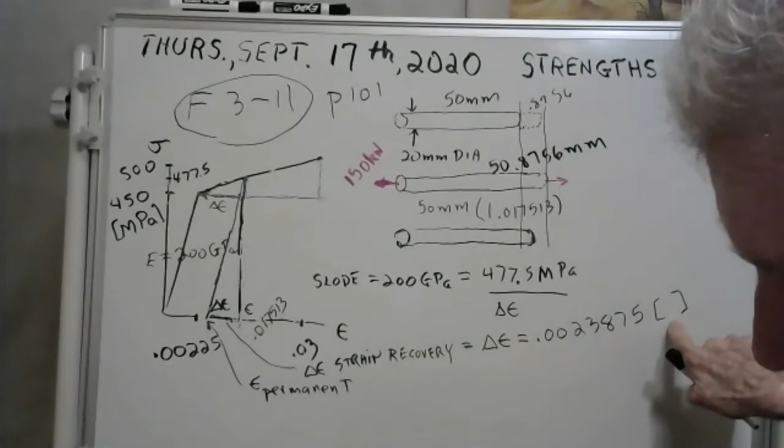Ben, I'll pick on you one last time here. What's the units? What's the units for strain? Oh, for strain, there's no unit. He's got it, he's catching on. There are no units for strain.

But now we have this strain recovery, and now we can get the strain right here. Yeah, we can get the strain right here. Because see, I know what the strain is here. It's 0.017513. And if I just subtract this strain recovery, I can get the permanent strain, if that makes sense.

So let me do that. We're going to take the strain. We worked hard to get that strain. That was the strain here when the piece was under stress. It's 0.017513. And see, we're going to subtract the strain recovery, which Ben has as 0.0023875.

See, this is the recovery, and this is the strain we have under the load, the strain under the load. And then if you subtract those, we'll have our permanent strain. All right, I'm going to do that now.

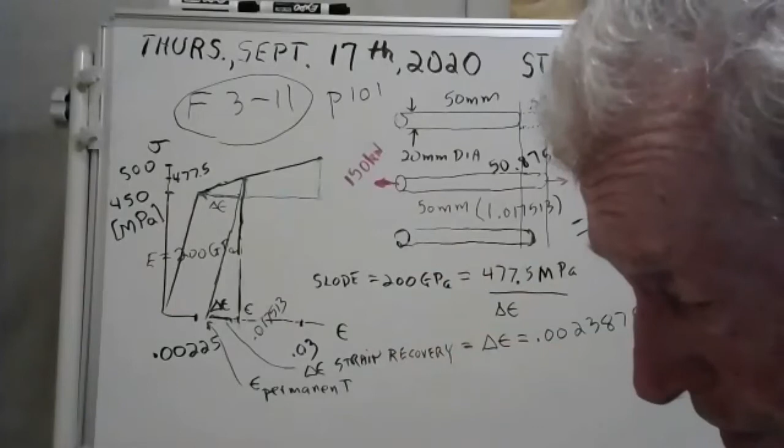Now we can find the final length after you release the load. You can find this final length. I tell you what it'll be: it'll be 50 millimeters times the strain, which is 0.015126. Those are millimeters. And this should give us this final length of our specimen.

Okay, here goes, I'm going to do that now. Oh, wait a minute, then you'll have to add it to the original 50 millimeters. You can either do it that way or you can put a 1 in here. Let's do it that way. I'll put a 1 in here. And this is going to give us our final length, and here goes. I'm going to do that now.

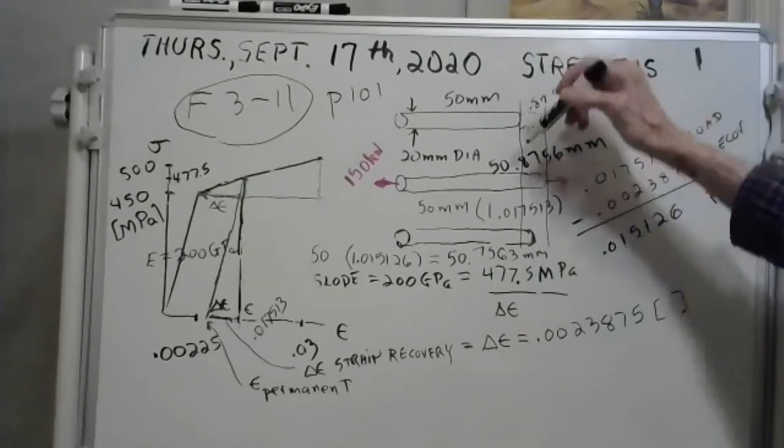I'm getting 50.7563 millimeters. See, it started off with 50 millimeters. It increased to 50.87. They took the load off, and now it's 50.75. Now, what did they want us to find? They wanted the permanent elongation of the specimen. Well, the permanent elongation is that 0.75. It was originally 50, and now it's 50.75.

That's a deformation, that little symbol delta. The answer in the back should be, if we did everything correct, 0.7563 millimeters. That's called the elongation. Another name for it is the deformation. It's the permanent deformation. Now let's look it up.

This was fundamental problem F3-11. We have 5 minutes left. We might have more fun. Help me find fundamental problem 3-11 here, and we'll see what they said.

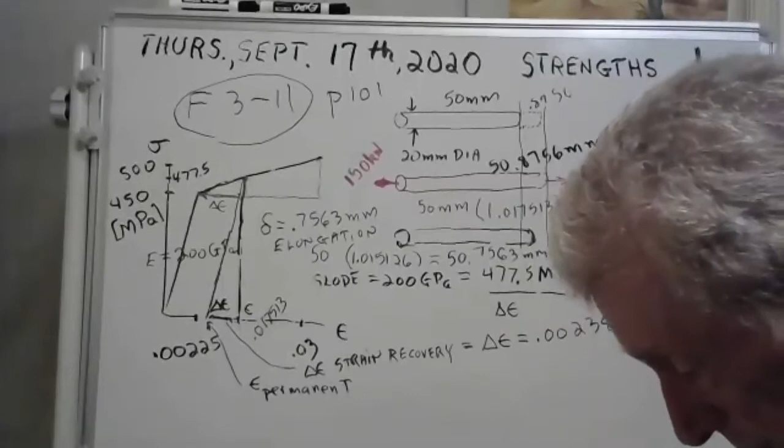311. They said 0.755. Now what did we say? The book says 0.755 millimeters if you go to the back, F311. Well, we're pretty dang close. I wonder why we're off a tiny bit, but I am not going to obsess about it. They got 0.755, we got 0.756.

And I hope you understood it. All right, now we have 4 minutes. I want to show you this modulus of resilience now. We got time. Are you happy with that? Any last comments or words on that?

Okay, and you know you have that test. I forget when it's due. I think it's tomorrow night, maybe? Is that what it was?

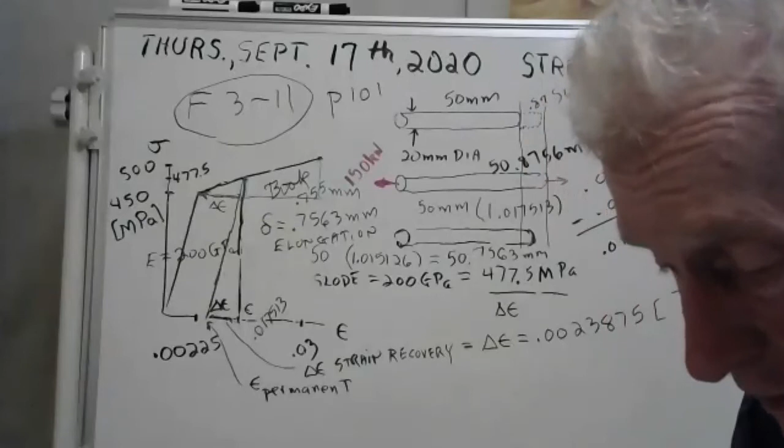Hey, Mr. Griffin. I uploaded the test already, but I realized I made a mistake and only uploaded the first page by accident. So it's probably only going to be the first page of the grade. Can I just email you the whole test that I did directly? Well, I'm afraid you're going to have to. Who am I talking to? Brendan Harvey. It'd sure be nice if you could have sent me the whole thing on Blackboard, Brendan. Yeah, as soon as I hit submit, I realized that I only had uploaded the first page. I don't know why I did that. Well, we're both learning. Hey, I'm learning this stuff too, you know. And let me tell you, Brendan, it's harder for me than it is for you. Oh yeah, I bet. But yeah, we're not going to fuss with you.

Okay, all right. I got a little time. If you guys are all happy on this, we got time to show you the modulus of resilience, but I need the room. So I'm going to say goodbye to all that. That was fun. Wasn't that fun? Nobody said uh-huh.

Okay, now what we're going to do is find the modulus of resilience, and the symbol is u sub r, and all it is the area under the elastic region. It's the area under the elastic... Where are you going? Oh yeah, okay, bye, I'll see you later.

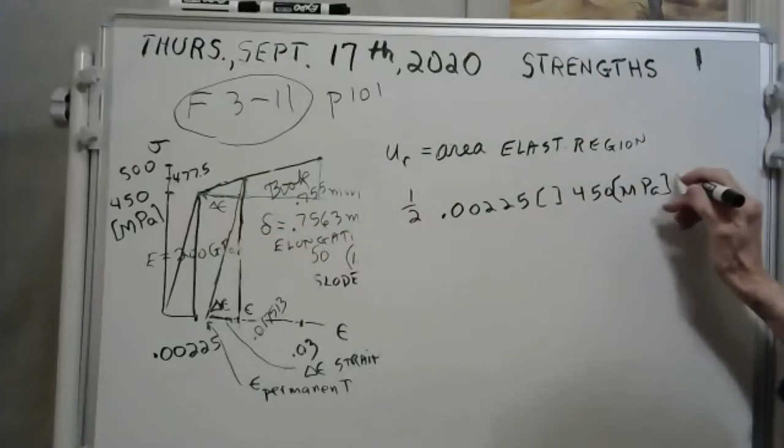Okay, well, it's a triangle. Oh gee, we only have 2 minutes left, I'm gonna have to hurry. But see this triangle right here? It's 1/2 the base, and the base is 0.00225, times the height, which is 450 megapascal.

Okay, I'm gonna do that now, and we'll get the, they have a name for it, it's called the modulus of resilience. All right, so you take 1/2 times 0.00225 times 450. Watch it. That's e to the 6th equals. And here's what I'm getting: 506250. And you know what that is? That's pascals. In other words, it's Newton per square meter. That's what a pascal is.

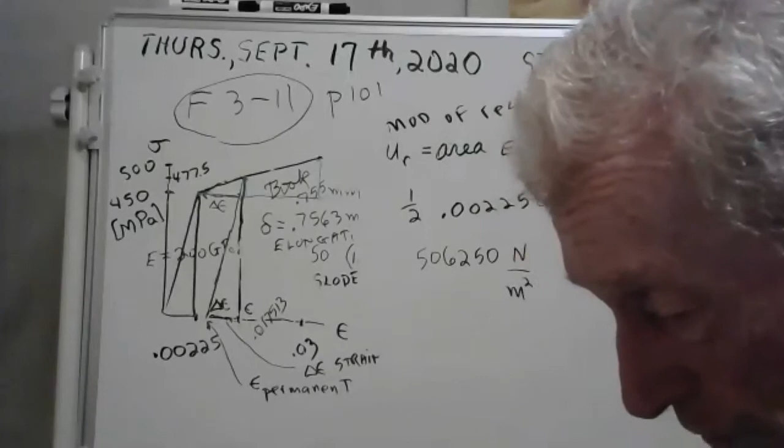Now to get energy per volume, you just multiply by m over m. And see, Newton times meters is joules. Why don't we make this fancy? Why don't we call it 506.25 kilojoules per cubic meter? Did you understand that? That is the modulus of resilience.

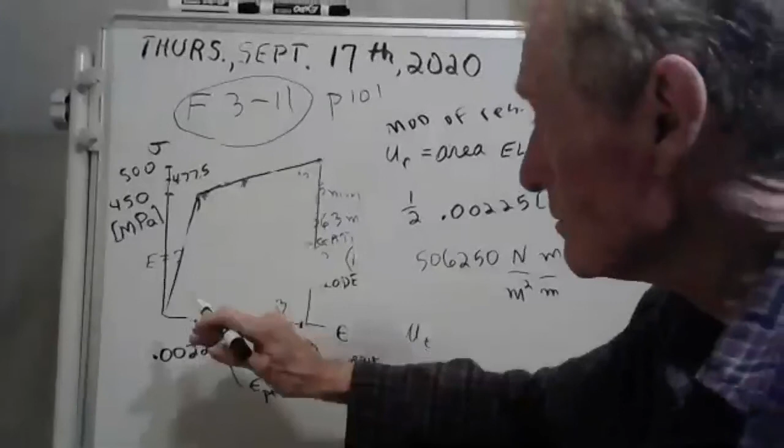Now, if I had time, I would do the modulus of toughness. I don't, but I can tell you roughly how to do it. Remember, the modulus of toughness is this entire area under the graph. Somehow you've got to figure out this entire area. Well, that's not that hard. There's a triangle here and there's a triangle there, and this is a rectangle. So figure the area of that triangle and that triangle and that rectangle, add them up. And then you'll still have to do this little trick here in order to get energy in joules. If I had time, I would do that, but I don't.